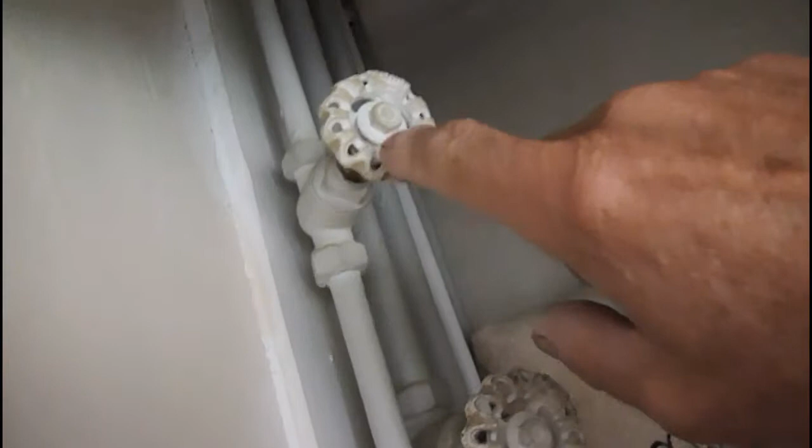But basically that's the stopcock. Now let me show you my gate valves. This one feeds the boiler because I've got a little F&E tank up there, and this one feeds the cold feed to the bathroom, because all my cold taps are off the tank. You can always tell if they're off the tank - as a rule of thumb, if you can hold the water pressure back with your thumb, that's pretty good indication your cold water is off the tank and you'll have a gate valve.

And I've got another one here - this one feeds the hot water cylinder, which is down here, and that in turn comes out and does all the hot taps. So basically my hot and cold in the bathroom are there to shut down, and that's generally where gate valves are used, on low pressure.

The only thing with gate valves is after a few years they don't shut off quite properly - the gate gets corroded, especially in hard water areas up in Kent. You get lumps of grit, and if there's iron anywhere on the mains system, that iron can also get under the gate. So sometimes they don't shut that well after a while, but that's just a function of the gate.

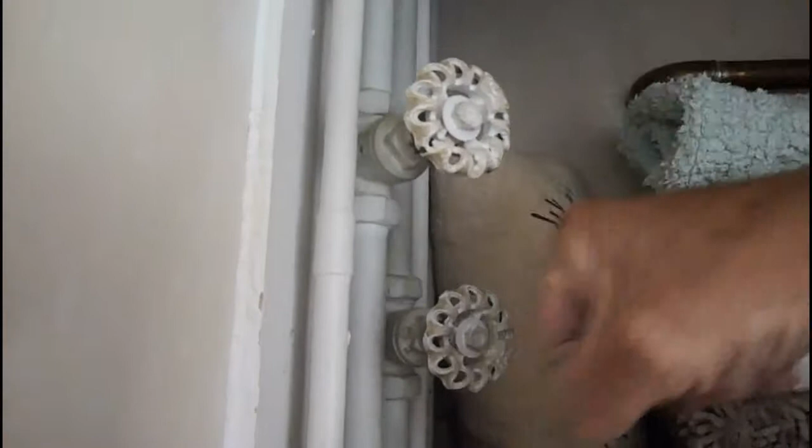Also with a gate valve, don't ever be tempted to shut these down hard with a pair of grips, because I've had cases where the gate snaps off inside the actual housing. When you turn it back on you won't get any water out because the gate is snapped off inside, and believe me, it's a devil of a job then to drain the water out of the tank up in the loft, get that nut undone, get the water out of the line, and fit a new valve.

It's a terrible hard job, so don't be tempted to shut one of these gate valves down hard with grips just because it's letting by. I know you can give it a tiny bit, but if you don't know what you're doing and you grip it off really hard to stop the water because it's not shutting properly, there's a likelihood you could snap it off in the off position, and it's an absolute nightmare to sort out.

Okay, so just a word of warning with gate valves. Now I'll just show you a quick drawing that I've done, just to show you roughly where they go, as I've just showed you there.

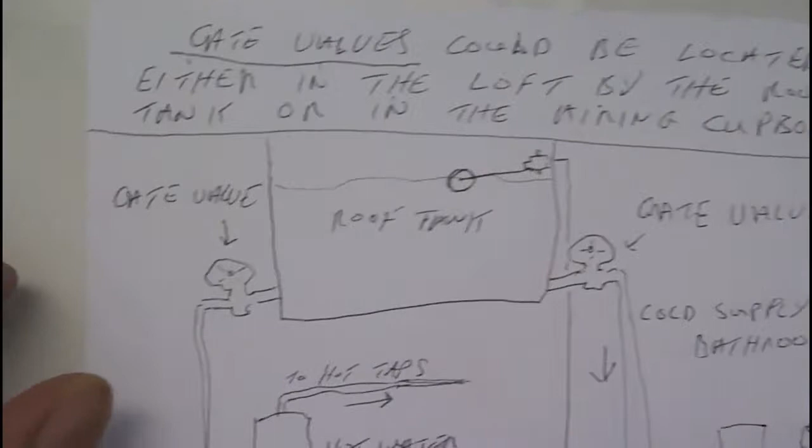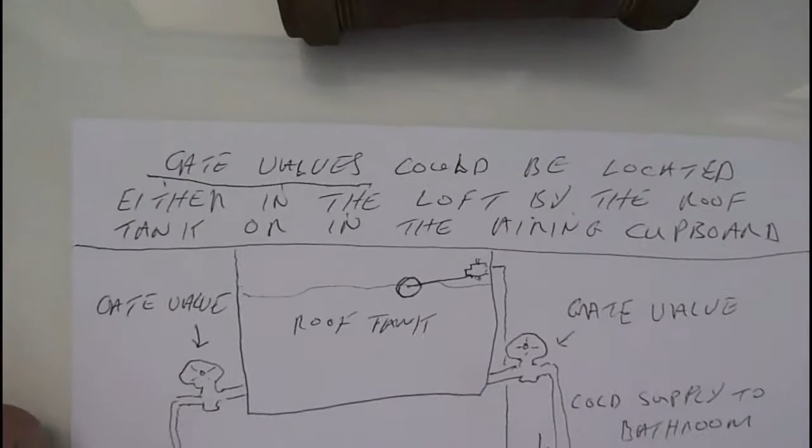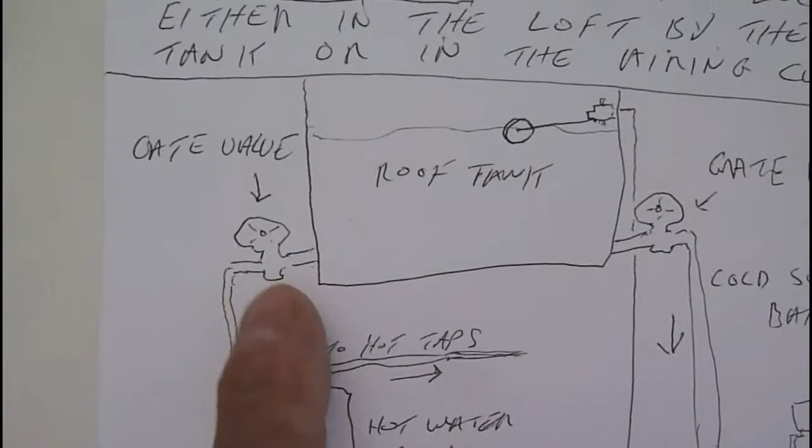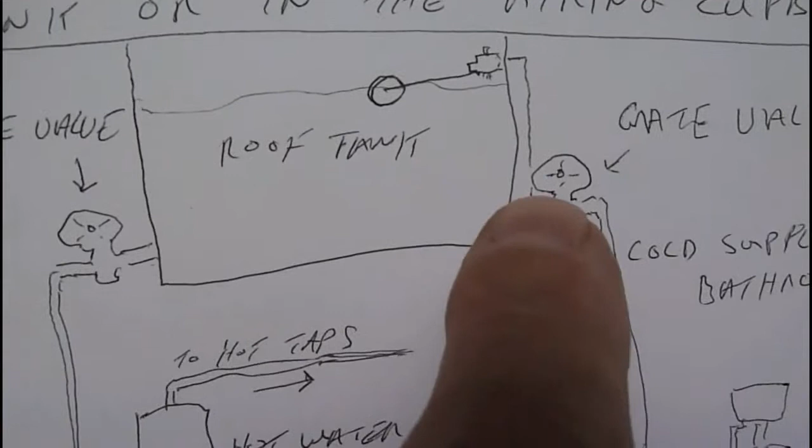Gate valves usually are located in the loft, by the roof tank, or in the airing cupboard. Generally these days more the airing cupboard, but if you can't find them in there, it probably will be in the loft, unfortunately. Now as I've shown on this drawing, this is a valve that's in the loft, and they're usually right next to the tank, as the pipe comes out. That one goes down into the hot water tank and out to your taps, and this cold feed comes down here and into your toilet pan, basin and bath.

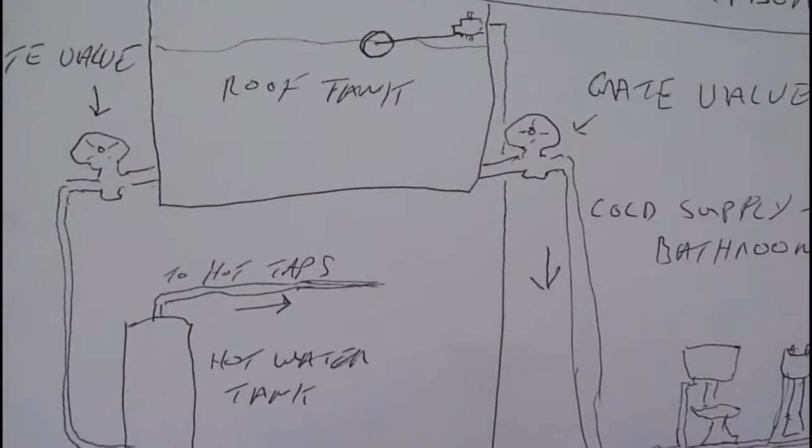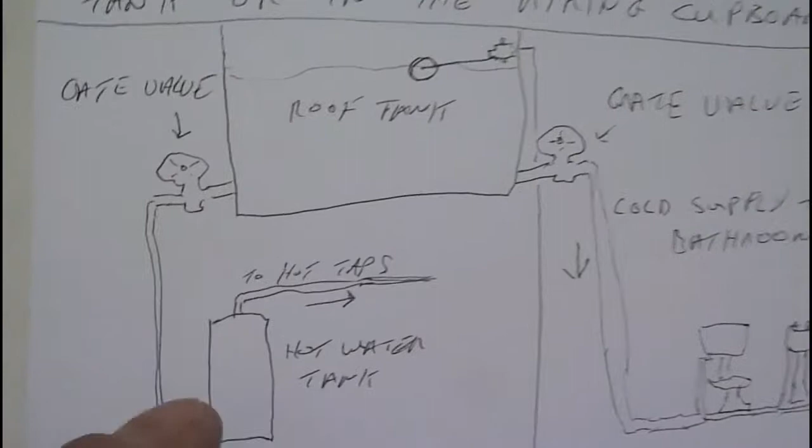Sometimes you don't have the cold water off the tank for the bathroom - it could be mains fed, in which case this one won't be there. But if the valves aren't there, so if you're lucky like me, you'll have the valves in the airing cupboard, and it will still do the same. You haven't got to go up in the loft to shut them down, but that's not always the case. If they're not in the airing cupboard, I'm afraid they're in the loft by the tank. So that's basically their use.

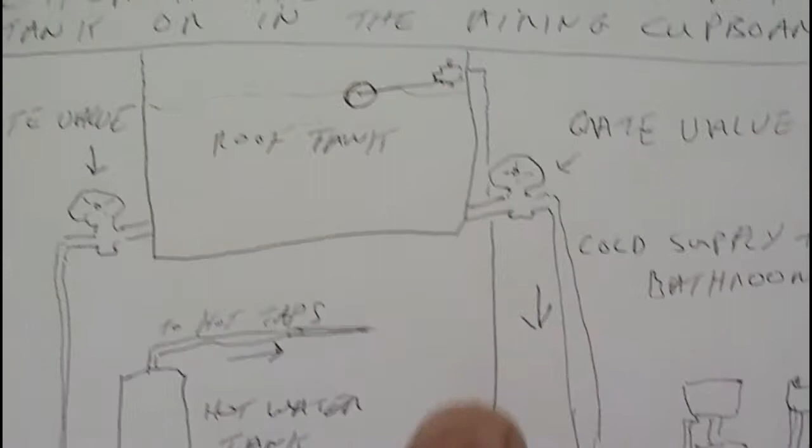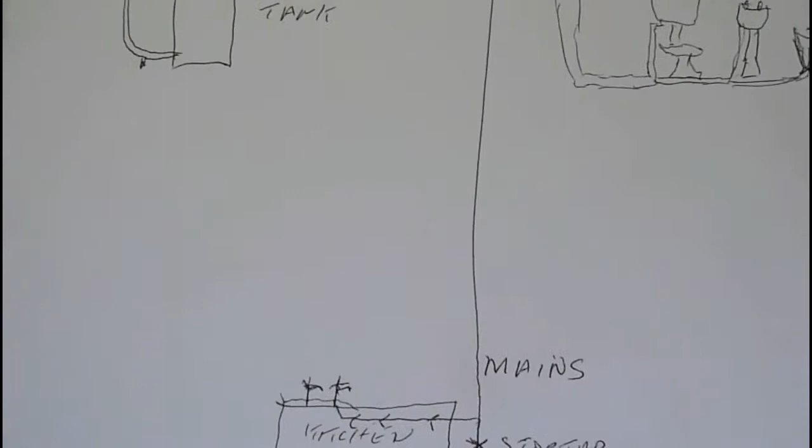The mains, as I say, comes up and feeds the ballcock, the main storage tank. A lot of houses are just mains up to the roof tank, feeding the valve, and that's it, and you'll have a stopcock there. Also, if you have a combi, you won't have any of these gate valves anywhere. If you've got a combi boiler system, pressurised, you will only have a main stopcock going up to your combi. There won't be any gate valves, so that's another thing to bear in mind if you've got a combi system.

And the only other tap that's a stopcock will be your outside stopcock. That's out in the path, the garden, it may be just inside the garden wall. Usually these days they have a water meter attached to them - there can be a little plastic thing. I've got a video on one of those showing that somewhere. If you look on my channel, Darrington33, how to locate and where to turn them off if you've got one that's a little plastic half-turn valve with a water meter.

Otherwise you'll have an ordinary stopcock and you may need a key to go down to turn it off. They can get a bit stiff, because they don't get used all that often. And the mains will come up - you'll have your stopcock down by the sink or under the sink. I'll put it beside it there. And then once you shut it down, you shut the main cold to the sink and you shut the main cold to the roof tank.

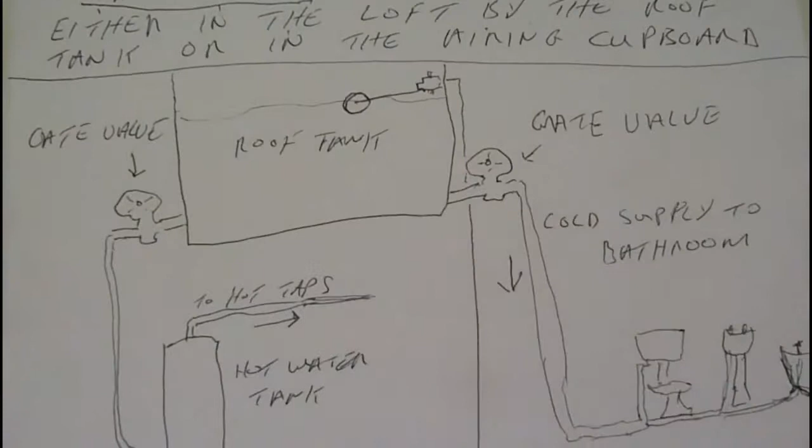And that's basically their uses between stopcocks and gate valves and where to locate them. Generally, I mean, there are some odd cases, maybe valves might be put in odd places in houses, but really this is generally the norm. So if you're trying to find out where your valves are, that is usually the normal situation as we've got it there.